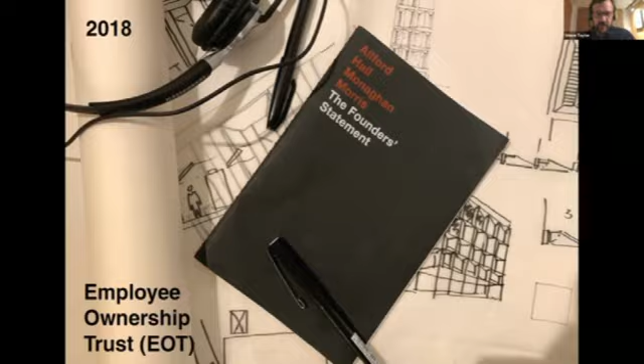We're all part of that co-op, and what the partners put together was a founder's statement about our attitude towards architecture around 3 principles: architecture, alliance, and ambition. These are the guiding principles that help us as a practice continue and approach all of our work, developed by the 4 founding partners while working together at university.

Firstly, it was for them about how the field of everyday building, rather than public buildings, that modern architecture has failed the city. So it's very much about the ordinary and the extraordinary, those ordinary buildings ultimately becoming extraordinary. And secondly, it's about how the functional program alone is not sufficient to generate an architecture. So form follows function, function follows form.

It's about constructing the idea. It's about understanding all the influences that affect architecture and its place, from a strategic citywide scale right down to the places where we live, work, get educated, get cared for. It's about those very average everyday buildings and making them extraordinary.

So the idea about constructing the idea is important for us. It's also a kind of theory of obliquity - it's about not really coming to a solution too early, but finding that solution through the process and approach, which we enjoy.

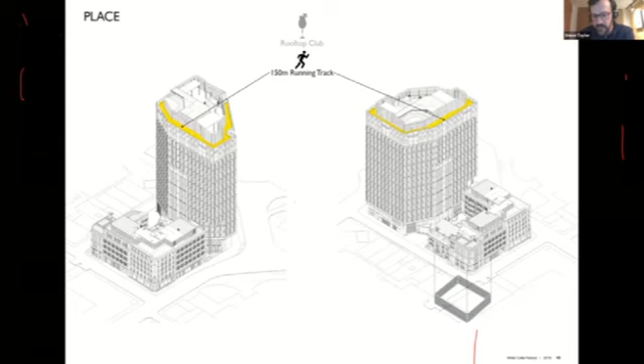The tops of tall buildings tend to be set away from the primary facade to allow cleaning apparatus to trundle around a track on the perimeter of the rooftop, hanging very brave individuals in carriages to clean and maintain facades. We felt that when it's not being used for cleaning the building, this perimeter track could be used for something else as extra amenity for the building occupants.

It was then about 15 floors of flexible workspace for lots of different occupiers, a multi-use, multi-let building. We had a public coffee shop in the reception.

Rather than a very stale corporate environment, this was very much an open, almost bookstore environment where one could come in and converse and meet people from the building in the reception and enjoy a coffee or a lunch. It was the introduction of a public courtyard and garden at the heart of this project.

Very urban, quite an edgy environment if you like. The idea of providing this enclave, this courtyard where people can enter buildings from, so all the addresses are within this courtyard, fully publicly accessible 24/7.

It's a nice idea. Cyclists being a really big part of our cities and how we move about them, so providing facilities for those. And then the idea of smaller buildings, so not just large floor plates for large corporate occupiers, but smaller floor plates for incubators and startups. So people starting out their businesses can rent space here, develop with this client, and ultimately take other space in the building or elsewhere in their portfolio. As a developer, very keen on nurturing talent and nurturing businesses.

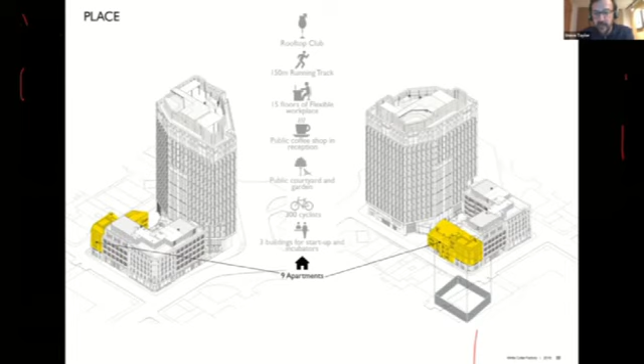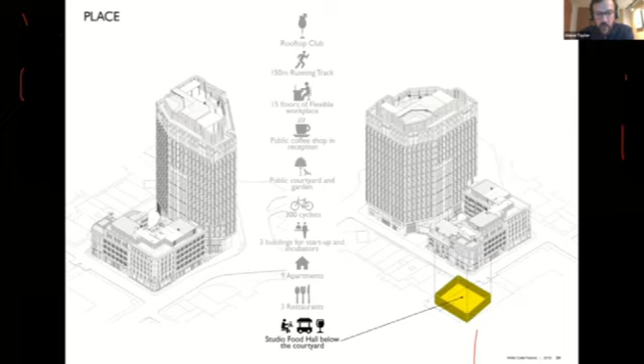And then there's also an element of housing, as a kind of mixed-use scheme in a city, with some food and beverage at street level. And then ultimately, I'll come back to this room because it's really important to us now as AHMM, a room beneath the courtyard, which offered this voluminous space for multiple uses.

So it's this idea borrowed again from Buckminster Fuller, who coined this phrase about doing more with less. It's this idea about reducing the moving parts of a building and what you put in, right down to those elements that all buildings need. So it needs structure, superstructure and substructure.

It needs services, so air and water and electricity through this building. And it's about skin, about the fabric keeping heat in and cool out, but also letting daylight and sunlight in as well. So it's about those three elements that buildings need, and really nothing more.

We're trying to do more with less, and we're also trying to make sure that everything we add to this building is doing more than just that one function. So structure is being used here—the concrete's being used to carry cooling through the building. We're installing cold water pipework in the structure to provide the cool for the building.

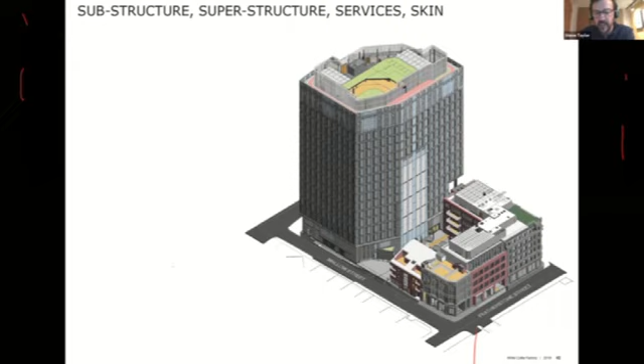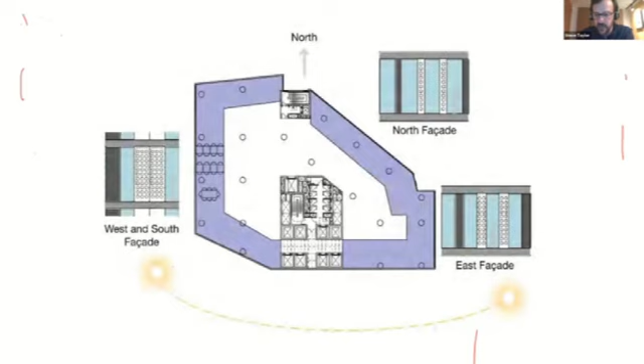The facades are letting the air in, but they're also working in tandem with our conditioning, our internal environment conditioning systems, by not letting too much solar gain in, letting air and light in, but not solar load. So we have a facade that changes in orientation, closed towards the south at about 30% glazing, and towards the north it opens up at about 60% glazing. So you naturally get that passive response to the environment and orientation, providing a natural variation to the architecture on the facade. Again, doing more with less.

So it's about ventilation through the facade and daylight. And even on the image on the right-hand side of this slide, that facade is only 1/3 glass and 2/3 solid. But in actual fact, the overarching view is one of light and air and sunlight and light and shade.

It's also about this idea of a symphony, if you like, of the services—the building's arteries that pass the systems through the building of air and electricity and fire protection, the life safety systems—bringing those to show, organising them carefully, but then above that having this concrete slab. So this is the idea of almost the sixth elevation. If the roof can be considered the fifth elevation, the soffit surely is the sixth elevation and occupies a large part of the internal environment.

So the idea of using that to provide character, using those functional elements to provide the character and personality of a space, is something that really interests us. But above that is then this cold water pipework, all embedded in the concrete. It's not a new idea for us—the Romans did it with hot water, as we know.

Lubetkin and others did it with cool water, but the technology sort of 50, 60 years ago let that system down. Today, with modern extruded plastics, we can have jointless pipework, miles and miles of it, without fear of leaking. So it's a very passive idea about cooling the building.

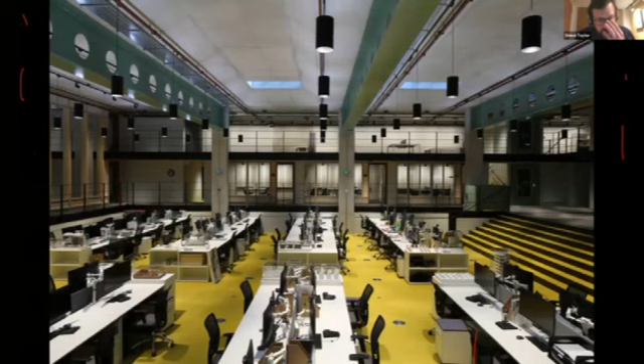It was a space that we felt was -- these found spaces in buildings are often the things that are most memorable. Certainly when we look back at buildings that are 100, 150 years old and repurpose those for the 21st century, one often finds that some of those quirky spaces are the ones that people are more interested in. So much so for us that we've taken the space ourselves as an extension to our London office and created another studio for us.

This is particularly pertinent -- we've delivered this through the pandemic, so it is as empty as it looks on the image until we're allowed back in there, probably in June when Boris releases us all from lockdown. But it was a space that's given us the ability to breathe a bit and widen the space for each of our members of staff, and really puts our money where our mouth is. So when we say to clients, build these spaces, they will come. They built it and we happen to come to it because it really suits our needs.

A really exciting space for us to inhabit post-COVID, with limited daylight from above and using circadian lighting, artificial lighting following the rhythms of daylight outside, linked through sensors to daylight levels outside and color temperature, changing throughout the day to make this a kind of healthy looking environment.

So a quick journey through this building from reception, from the main entrance approach, quite a robust and gritty street presence at Old Street Roundabout, into what we refer to as a kind of turbine hall rather than a reception hall. This idea that everything's stripped back, so structure, services and skin are really the only things that you see here, other than loose furniture.

And it's a principle which really tested the boundaries of speculative commercial office space. There are a lot of naysayers at the start that are sort of very familiar and comfortable with the vanilla sealed box for workplace, and we wanted to change the attitude towards that, and the developer, our client, was the driving force behind that.

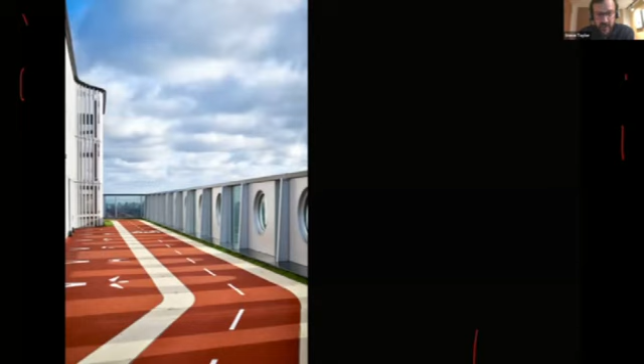That idea about the club at the top of the building, so the building occupants can come out and break out and have a coffee or a beer in the evenings, and also break out into the outside terrace, and then also, if you're that way inclined, take a run on the running track at the top of the building. So all amenities to break out and converse with your fellow building occupants, giving that fluidity and flexibility in the way people approach work.

And giving that sort of fluidity and flexibility of the way that people approach work, ever more important now as we emerge out of the pandemic. And the rooftop terrace as well.

So the White Collar Factory building was a project which really was about 10 years in its making, from working on other buildings to the concept, to the prototype, to the physical building fully completed and let.

The next iteration of that then brought us to Bristol. So this is the assembly building, which some of you will have seen going up on Temple Way. And it was for us the next stage in this attitude towards creating better, characterful workplace. So that idea about making the ordinary buildings extraordinary, the buildings of every day.

These buildings have somewhere between 2,000 and 3,000 people within them. So if you can touch and improve their lives just on their day-to-day working experience, then that's architecture working really hard for you. So this was a project, as I say, the next iteration of the White Collar Factory principle, doing more with less, putting fewer things into buildings.

It's a site you're all familiar with, a site that actually laid vacant for a number of years. It used to have this building on it. Some of you will remember it. I certainly do. A building that was there for about 35 years before its carbon was released by it being knocked down and the site leveled.

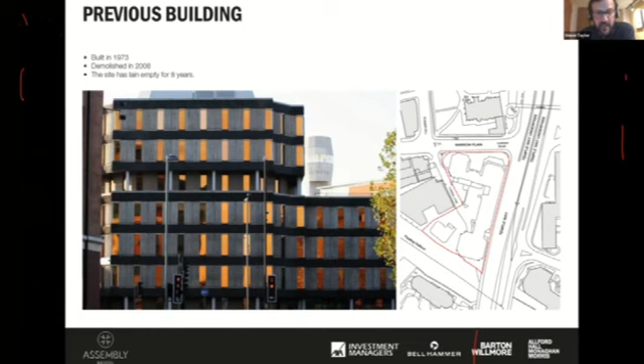And as it says here on the top left, the site laid empty for about 8 years. There was a planning application made by another architect with another client to put 2 buildings back on the site, but this was never realised.

We came in working with AXA as an investor into Bristol, so sort of like all these projects, investment from pension funds, taking long-term views. We won this project in competition.

Based on some very early sketch ideas that actually held true right the way through to what we've produced. This idea about opening the site up and providing public realm on the river - very few moments where buildings can do that, and we can do that in our city along the floating harbour. Wherever we do that, it's a surefire hit.

It's always very popular. In this instance, this site is south facing onto the river, so really great opportunity to link it with this river, link the city with its river and buildings around that. It's about enhancing the site margins and providing some space for buildings to breathe.

It's about sort of framing key views. In this case, it was the Pip 'n' Jay Church, and framing a key view between river and the church so that buildings didn't encroach on that view. And it's also about this idea that buildings themselves can frame views and create the idea of interest and intrigue.

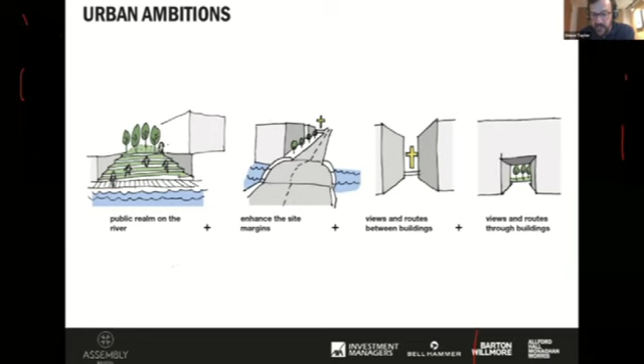To then continue on routes - in this case, a historic route which was once lost, brought back into sight. So a number of diagrams here show us that this project was about 12 months in its design before being submitted for planning.

This is just a snapshot of some of those moves - the idea about taking that site boundary, maximising its footprint in order to hold the street edges, understanding some of the moves sort of encouraged by the consented scheme, the previous project, looking at what can be improved on that.

This idea of creating this new route or re-engaging a historic route - this is Cheese Lane, which I love as a name, that continues onto Bread Street, the other side of Temple Way. So reintroducing that across the site to open the site up, opening up views of the river and access to the river.

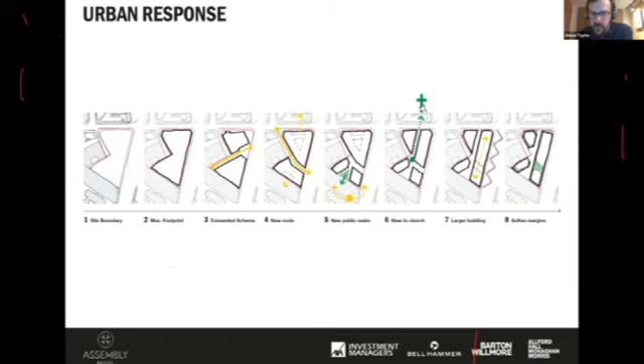So forcing the buildings apart on the river's edge and creating this heart towards the middle of the site that links these views from church through to river. And the next slide just indicates that.

So this idea of this sort of connection from station to city - this idea that we're introducing a pontoon on the river's edge to increase that, extend that walkway from Temple Meads through to our site and then up into the site and then on towards the city, and those connections, those visual connections between church and river, as I say.

And then it was about sort of picking up on some of those principles established in the White Collar Factory project and moving them forward again - 10 principles about making a place, about creating that journey.

Journey on approach to the building, through the front door, all the way up to desk. That enjoyment of the building has to work hard all the way through that journey. All too often we enter buildings, go in to find the sole function of that building, and then are left feeling slightly disappointed.

All the effort was made on the front door and that sort of curb appeal. We feel that sort of enjoyment needs to continue through every part of the building.

So it's about generous and flexible floor space to attract lots of different occupiers and allow lots of change - buildings that are robust to that change, enhancing the user's experience of the building and how they can interface with the building. All too often buildings can be very closed and sort of control their own environment, whereas we believe humans should be in control of that environment.

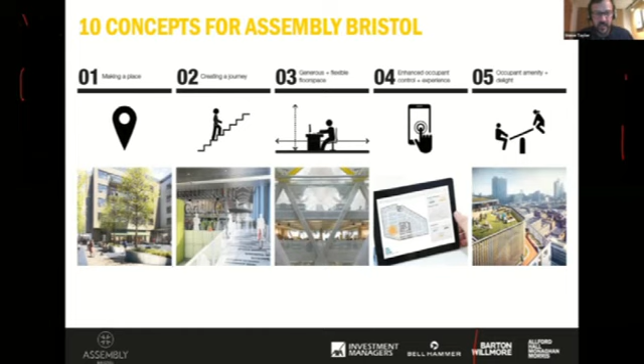And obviously adding amenity and delight, really important, as I say, in post-pandemic developments. The idea around supercores, around how people move up and down buildings through staircases rather than lifts necessarily.

The idea about passive systems, smart servicing, so not creating problems that you then have to throw technology at - facades close down against the sun. The idea about smart engineering, passing services through structure, structure doing more than one function again, and the same with facades, and also how we then build it, how we construct it.

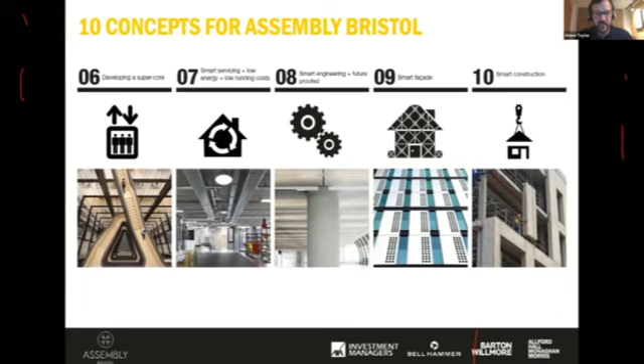Working with the contractors from very early on to understand the best ways of off-site construction and on-site, of course, minimising the number of trades and creating a carbon smart solution for construction. So it's about a building, as I said earlier, that provides for up to 3,000 individuals as one tenant, or a neighbourhood of tenancies as well.

So different occupiers, large, small and medium. As it happens, this building has now been taken by British Telecom as their regional HQ, which in itself is really exciting for Bristol. A bit of a shame that not more businesses could enjoy this building, but nevertheless a really amazing opportunity for them in the city.

So it's about well-designed workplaces, about complementary facilities, the idea about breaking away from work, and ultimately giving occupants that satisfaction of where they work, where they want to come to work, and in doing so creating a thriving, diverse community that better reflects the wider community in the city.

So a lot of these ideas actually look quite relevant today as we emerge out of the pandemic, but really were very much the direction of travel which we were on, along with a lot of our clients, and enjoying. I think there's just really an acceleration of a lot of those ideas as we emerge out of the pandemic.

So this idea about place, how that opens up onto the river, and this idea about these three buildings and the routes through. So you're holding street edges, but you're relaxing those edges within the centre of the project. And connecting to the city.

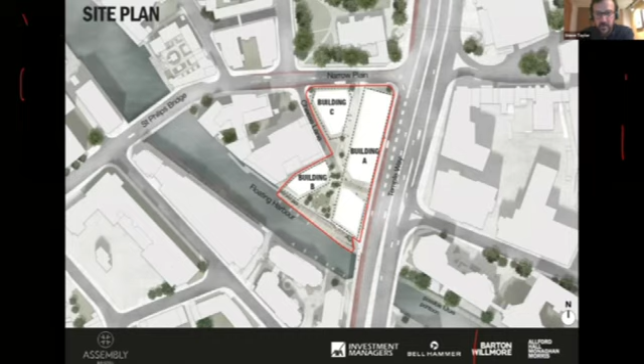So you might not make it all out in this tiny diagram, apologies, but this idea of us linking that walkway from River's Edge onto a pontoon beneath Temple Way and back up onto our site, and then onwards into the city via Castle Park.

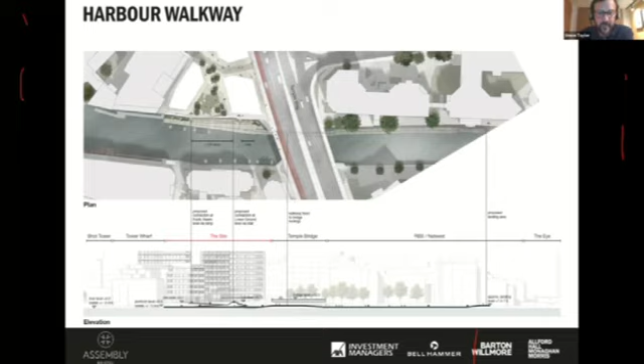So that creates a place which for us has sustainability and the environment at its core. It's about a diverse, active public realm, opening up those margins and opening up those routes through.

It's about reducing our carbon using passive design and efficient systems, whether it's about shading the building, so you're preventing that solar load, preventing the need to throw kit at it. It's about using LED lighting where you need it, but lighting that reacts to natural lighting levels as well, so it's not lights on all the time.

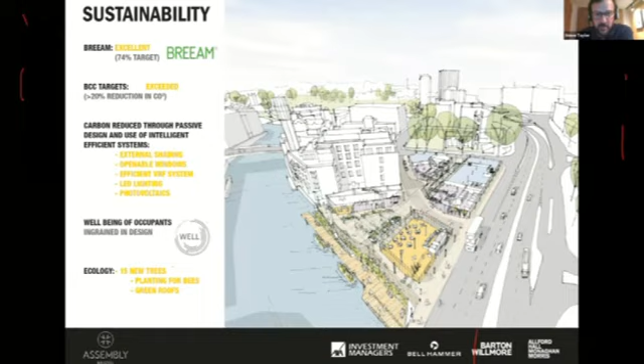Photovoltaics, the idea about sustainable energy generation, as we find on a lot of modern buildings. And landscape, of course, this biophilic idea between buildings at public realm level being really important, and using species of the area of the Avon Valley.

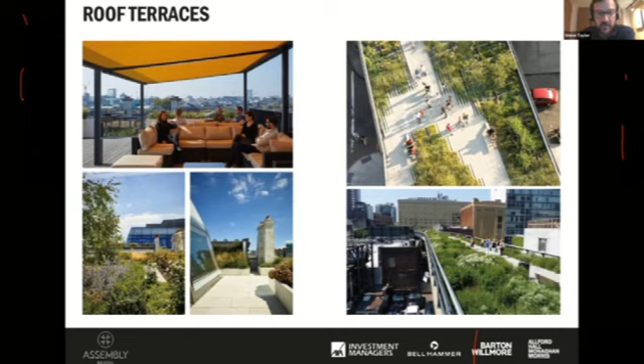And also on the roof terrace, on that fifth elevation, the opportunity for people to break away from work and convene at different roof terraces. So some are private, some are public to everyone else in the building, but different attitudes to how we engage with the city. And provide that extra greening, the urban greening, which is something that really interests us and ever so more moving forward, bringing that greening down onto facades as well with some of our more recent work.

So some of the conceptual diagrams about how we reacted to the context and some of those historic settings, how the floor plan, the building orientation meant that we could focus on the heart of the development as being where we enter the buildings.

The idea that Temple Way, as we know, is again quite a gritty environment. It's quite a noisy, dirty environment, which hopefully will improve over time. But the idea how we're using the building, the larger of the three buildings, as a buffer to protect the public realm in the middle.

How we're creating the two different ends of the building. One reacts to the city, one reacts to the river. And the idea about big open floor plates and how that can then be shaded by bringing the structure from the inside of the building to the outside. So structure which we need for the building, let's do more with it, and let's bring it to the outside to provide some of that solar shading.

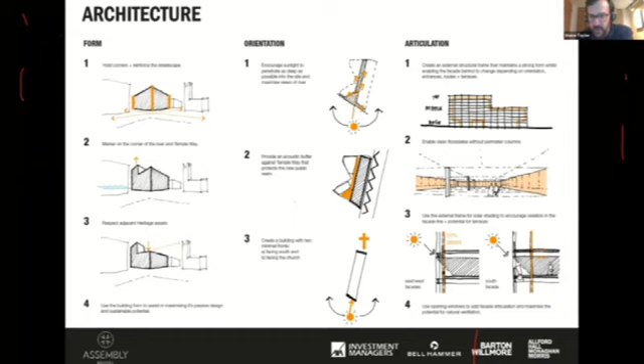So the idea that we're providing about 50% glazing on those more exposed edges, and then towards the south of the building, we're pushing facades back from the frame to provide outdoor amenity for each of the office occupying floors, and in doing so provide all the shade where you most need it on the south facade.

So we took those principles, applied them to the mass, applied them to the elevation, used the functions of things like staircases and lifts to then help articulate that longest of elevations against Temple Way, and help activate that most obvious aspect of the building as it faces the city. So the idea of how people traverse up and down this building and are seen doing so on the facade of the building.

Excuse me, take a quick swig.

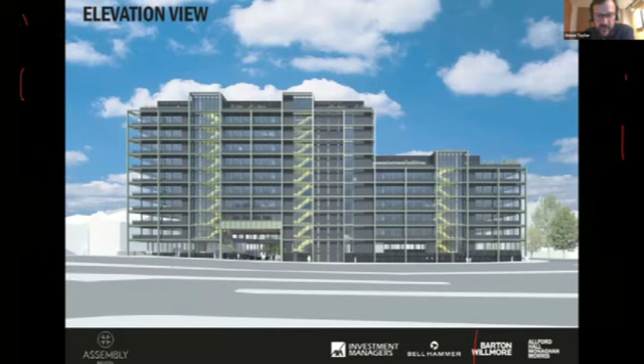How that facade, how the functions of a building are sort of played out and manifested on the facade, and that helps to add articulation and interest to the project.

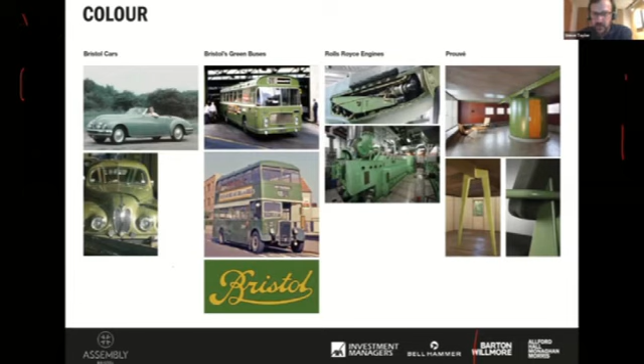The idea about colour runs through a lot of our work. It was good fun finding local references and finding the colour we wanted to apply to the frame. The olive green was something we think is embedded in parts of the history of Bristol. It's interesting, that idea of industry and transport and mechanics coming through to the mechanics of the building and being expressed on the frame.

Here we've exposed the steel frame, and we've painted it that olive green. We've created those moments here, like this extension of Cheese Lane up towards Temple Way.

This is now fully accessible to the public on their journey through towards Castle Park, ultimately bringing you into the centre of the development and the ability to enjoy the public realm and its connection to the river, providing this active frontage where everyone coming into these buildings enters from this courtyard.

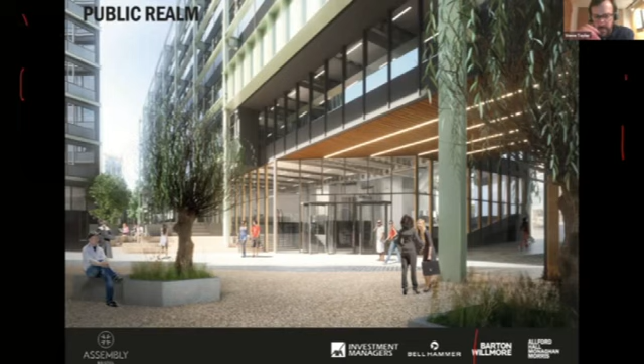So again, borrowing ideas developed at White Collar Factory in London and bringing them to Bristol, that next iteration of the idea. A bigger courtyard here than we had at White Collar Factory, enjoying level changes that all landscape architects love to get involved with, giving an opportunity to engage with the river and the city at different levels.

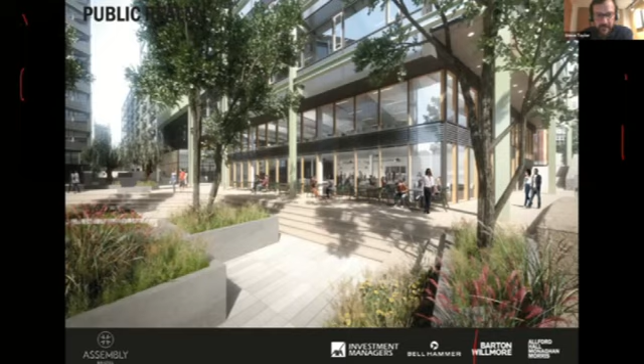More recent imagery showing how the other buildings are starting to come into play. This idea about cycle provision being front and centre of a development. Into the cycle store, it's all on levels, all at grade, so the cyclists have their own front door, not around the back, but front and centre.

Again picking up on ideas from White Collar Factory, not covering up structure with superfluous layers of plasterboard and follow-on wet trades. We need the structure, we need the skin. Let's use those as the architecture for the spaces internally and externally.

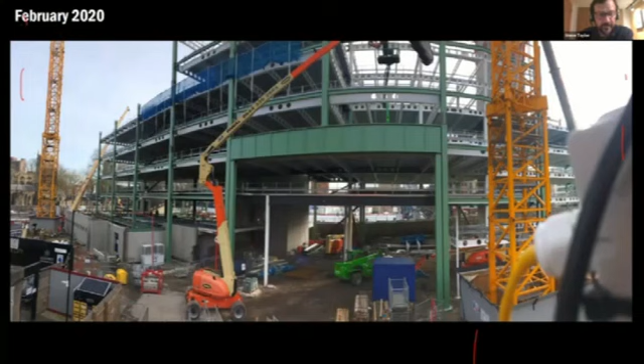This idea of opening up the volume, creating this library feel, or lounge feel rather, where building occupants can come and have meetings in reception and enjoy cafe, and potentially break out onto the public realm. So some more recent images of how the building's coming together.

You've all seen it emerging. These were from earlier in the year, as the new arch over Cheese Lane is appearing, with open floor plates, exposed steel frame inside and outside, ultimately.

Some of that glazing coming in, so you can see large picture windows framing views of the city, and then opening windows every 3 meters, so even if this building is separated into individual office cells or meeting rooms, every space gets access to fresh air. The idea about fresh air and natural daylight into the building is really important.

The orientation of the building as well—it's long, but quite shallow east to west. That gives us the ability to take all the plant off the roof and distribute it across the floor plates, so rather than centralized plant, we have local plant to each of the floor plates.

We draw air from the west facade, off this clean facade of the building, and then exhaust it onto Temple Way, so clean air comes in on this side, stale air out the other, across that narrow dimension on the floor plate.

That allows us to work more effectively, so you're not moving air all the way around the building from the roof down to the floor plate and around the floor plate back up and out. The energy is less, so our carbon is less in the operational energy of this building. It also results in a roofscape which is open for other uses like roof terraces and amenity, rather than being filled with building plant.

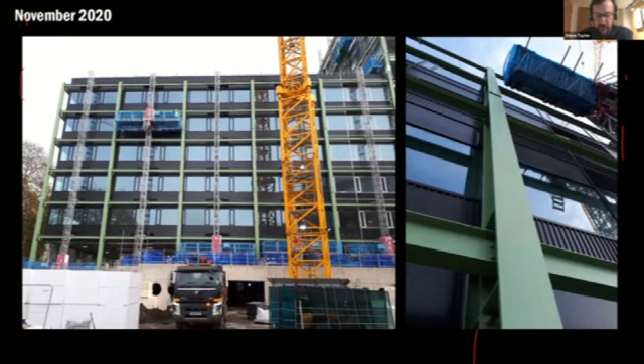Taking the idea of White Collar Factory but developing it one step further for this building. The facade, its orientation, the structure on the outside, the ability to open windows and frame views of the city creates the architecture—this layered depth to the facade, where operational elements like vertical circulation or structure are manifested on the facade of the building.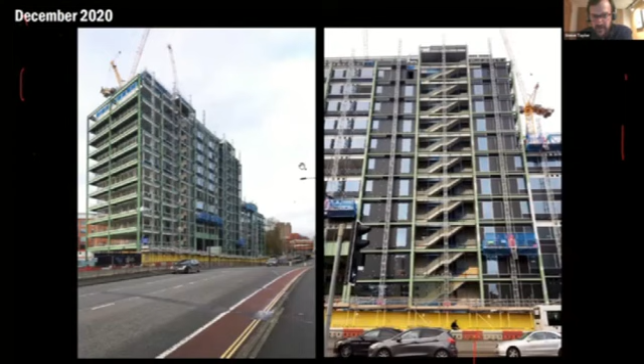That's coming towards completion, probably early summer of this year, as building A. The other two buildings we're about to start with: building B, on the river here in red, and building C, the blue building on the right hand side of this slide.

For these buildings we took the concept from the first building but developed it further. The second phase is not a copy of the first one, but an application of a kit of parts. What we really did was focus on how we put the building together, working with the contractor from very early in the design phase to develop a template for a kit of parts.

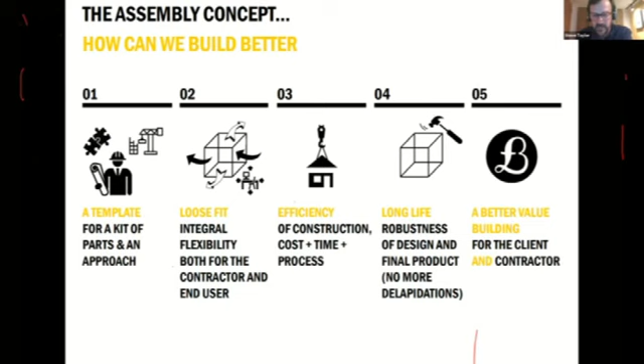So putting less into the building, doing more with it. This idea about loose fit, integral flexibility, both for us as designers and the contractor—how he wants to build it and how the end user enjoys it. There's an efficiency of construction, both in the time it takes to build and the energy it takes to build it and then run it. The idea about long life and loose fit, creating better value for both the client and the contractor, who needs to find some value in that process.

So it's about minimizing the number of building elements, minimizing the amount of on-site trades, maximizing modular and off-site construction, and minimizing wet trades and that reliance on water, which ultimately goes down the drain.

The idea about those key elements being finish and function—structure again providing finish. Maximizing modern methods of construction, early contractor input, and interrogating every single element again and again as a design team and a contractor team, to make sure it's as efficient as it can be. This project really took White Collar Factory principles, applied them through assembly building A, and then focused on how we procure and deliver that concept.

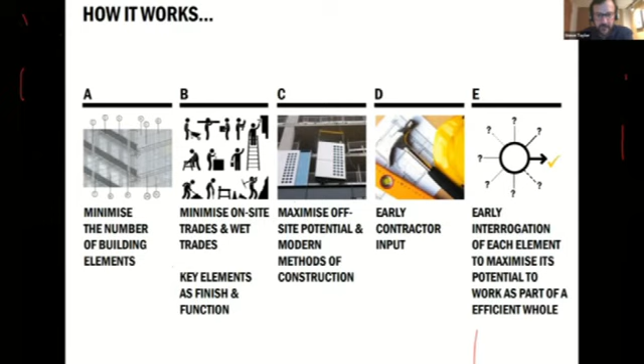So really focusing on the detail. And of course also looking at, as we've done with previous buildings, orientation—working with our in-house specialists at how buildings overheat, how they're overshadowed by adjacent buildings, so how facades can adapt to suit different conditions in its urban context and different orientations.

Facade systems again, where one can open windows, where facades are closed down to prevent solar gain, but there's a kit of parts that can change in assembly and organization depending on orientation and position on that facade.

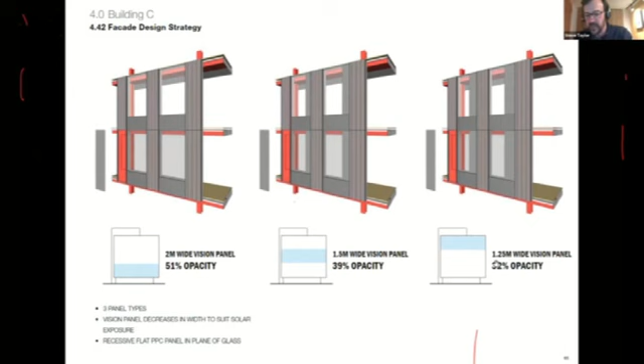You can see in these diagrams how the amount of opacity reduces as we go up the building. Where it's overshadowed by its neighbours, it's more open. Where it's up against the sky and that solar load, we close it down again to about a third open, two-thirds solid. That starts giving us a very subtle idea about the architecture—we're not having to apply anything else to the building. It's that function coming through and manifested in the architecture.

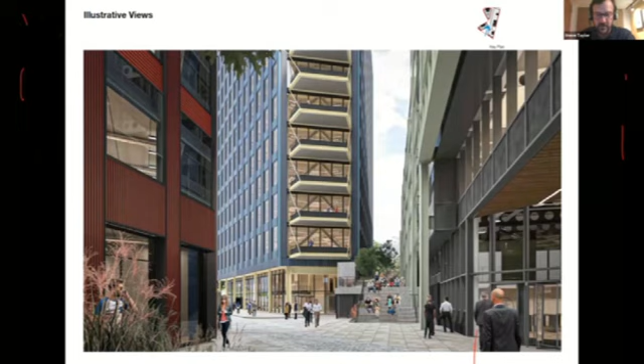Just some very early conceptual images of it in the city. The idea again towards the north, how the core is positioned with the functions of that core and its movement being manifested on the facade.

The idea about it lining Cheese Lane, this connection through and underneath Building A, but how the heart of the campus is where we enter these addresses and maneuver through quite a linear space and into the core and up the building. Quite a grainy image there, I apologize, but this idea about lining the street with reception, so we have that active frontage and engagement with the street at Cheese Lane, this wonderful cobbled street.

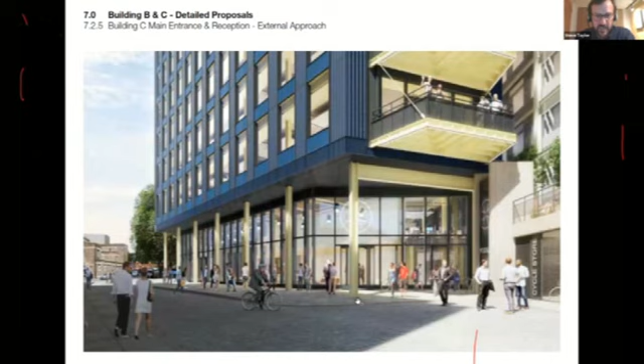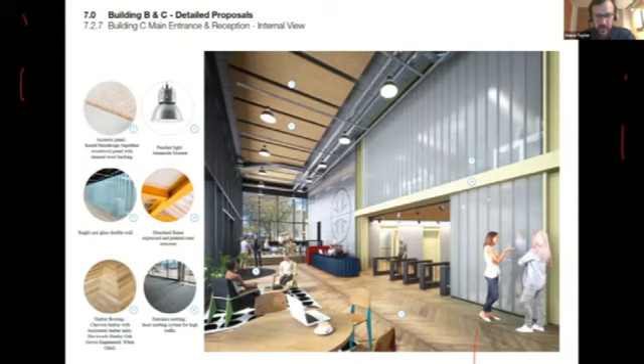The functionality of that space being very open again, open to the city and for the building users to enjoy. A couple of views there with the reception.

This idea about a super compact core, putting less into it, but allowing staircases to encourage their use with these large circular picture windows.

So as one traverses through the building, one can enjoy framed views as you descend the staircases, with these framed views over the city, and daylight as well.

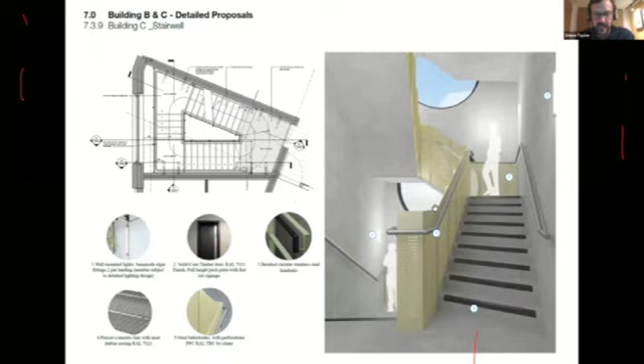And then a very unique shaped floor plate, this sort of arrowhead wedge of a floor plate, which frames a view towards the south and back up towards the wider part of the building. So really efficient open floor plates, lots of opportunities for different occupiers to enjoy.

And then at the prow of that wedge, or the nose of that wedge if you like, the idea of providing solar shading through balconies.

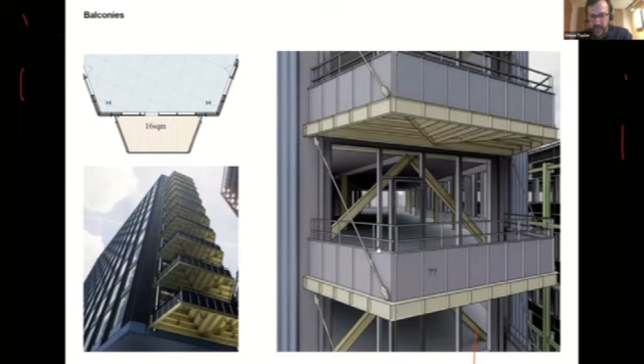So every floor plate gets its own outdoor amenity, overlooking the park and the river and the rest of the city beyond. Occupants get private roof terraces, private balconies, but there's also a communal roof terrace at the top of the building, again enjoying those views.

And the idea that there's this sort of club room where different things might happen, whether it's a gym class or an important meeting or some other uses potentially connected to community uses. This idea about engaging with the city and engaging with its rooftop there.

So you see this rooftop pavilion idea, which in turn helps to conceal some of the smaller elements of rooftop plant.

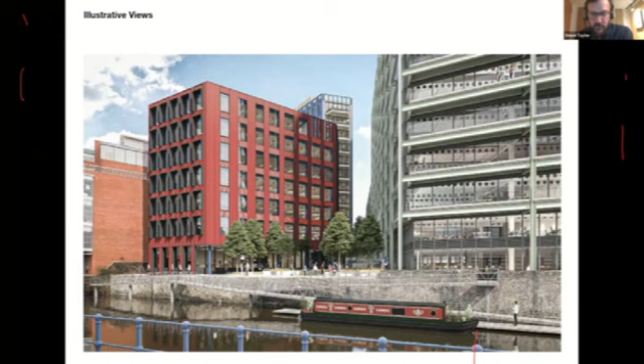And then just a couple of final slides of the third building, which is taking a bit of a backseat until the second building starts to emerge. A smaller, more slender building on the river, how that engages and is entered via that new crossing of the public realm from Cheese Lane, opening out onto the river.

And again, opening those views out towards the south and onto the floating harbour, and that vibrant, active public realm at the heart of the development.

So the next project, or the last one I'm going to take us through, is Number 1 Temple Way, a building you're no doubt all familiar with, as architects we're all sort of very fond of. A Brutalist building, one of very few in the city.

We're doing similar work on the IBM building, Denys Lasdun's building on the South Bank, next to the National Theatre. So this is kind of our Bristol version of that.

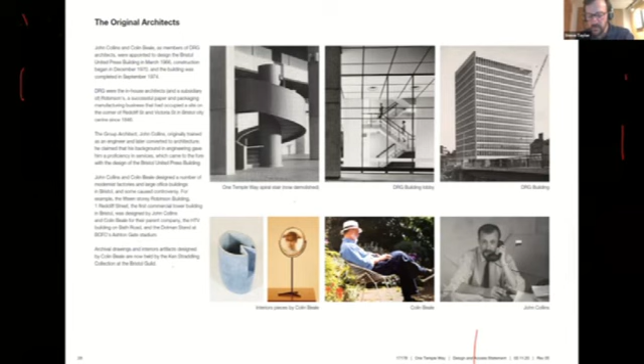A building designed by Colin Beale and John Collins as part of the DRG group, a really functional building. Following our ideas, whether it's white collar factory or assembly, these guys were doing it for this building 50, 60 years ago.

Building designed for Bristol Evening Post.

A building which we found has an amazing archive, including the original cardboard model, which we found in the basement store of the building. So lots of opportunity to engage with the original design and the concept.

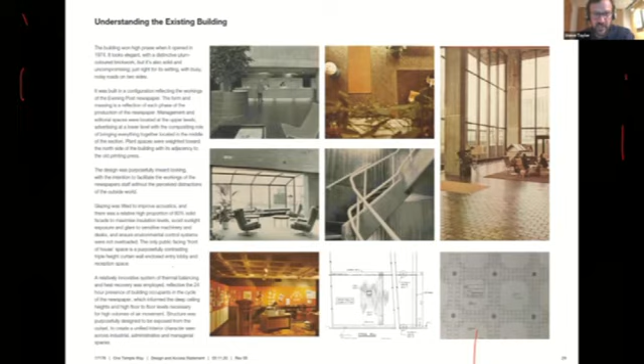And it was an idea about this building being around the clock, so it's about the writing, editing, production and distribution of post, of printed press.

It's a building which followed its inner workings onto the outside of the building, so each of the different interconnecting volumes, whether it's vertical circulation or some of the other pieces.

So you've got the windowless plant room, which is halfway up the building, weirdly for a commercial building. This has a plant room top, middle and bottom.

But this then fed into the printing press building, printing hall, which is now gone on the left-hand side. The idea about editorial, composing and dispatch being contained in different vessels as part of the building as well.

A building which was by brief designed to be quite inward looking, quite private, but the only public-facing element was the forum and staff access facilities, as you see in the image on the right-hand side where its current front door is.

A building which, since the press left it, and obviously our attitudes to how we read and absorb news is very different today, a building designed for such a bespoke use and function has really struggled, I think, in the latter part of the 20th century to find better, more appropriate uses.

But nevertheless, a building which has captured carbon and is robust, which should be robust to change. A building that's kind of lost its way a bit—it's accrued lots of elements in trying to make it attractive as a workplace. The concrete, the wonderful coffers on the soffit, need a lot of work to clean them up and improve them.

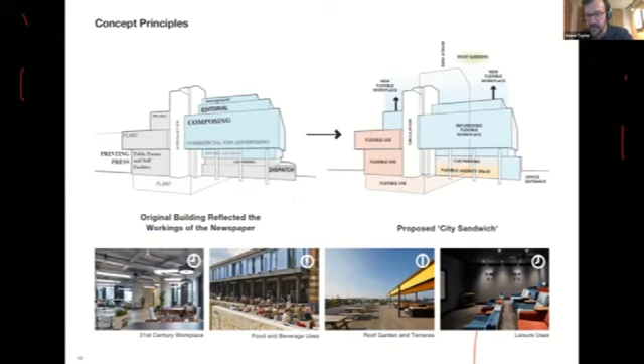So 21st century workplace, food and beverage uses at street level, the idea about roof gardens and breaking out again, and this idea of leisure uses within it. So again, a sort of city sandwich for Bristol.

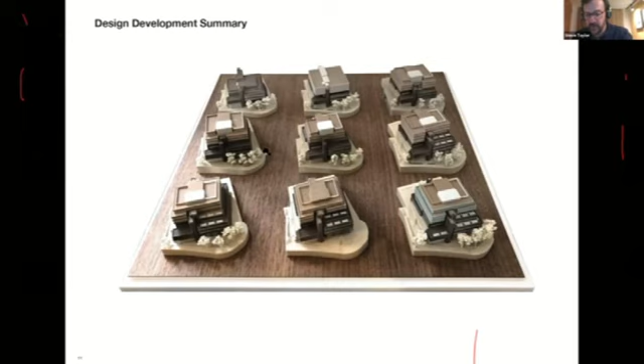We've looked at a lot of alternative schemes for this building. As I said at the start, we've got a really active model shop, which is a great resource for us to test in three dimensions how you might interlay this building—these were all iterative design responses, and there's a whole other cardboard box full of even more models representing different ideas that we tested.

Ultimately, it's about understanding the original building, looking at this asymmetric balance of volumes, adding new volumes amongst the original—a sort of Jenga connection of old and new coming together, bringing daylight down the building. These are very deep floor plates, very inward looking. Modern office occupiers need access to daylight and air, ever more so now with narrower floor plates, so bringing daylight down and through the middle through a new atrium is really important.

And then how you might top the building with a new mass, which doesn't dominate but sets back and does a sort of inverse or flip of some of the boxes that exist below. So some of these cantilevers, we look to replicate that sort of striation of broad shadow gaps and these shelves of accommodation. We continue that, but change the proportions as we go towards the top of the building—so it's a kind of lighter weight top to the heavyweight bottom.

Then a couple of moves here in this slide about how we take the existing mass, add a sort of dumb mass on top, and then start to articulate that by extending cores through and atria, stepping down and stepping away from those more sensitive edges. So you create this multi-layered building of new and old coming together, providing another version, a sort of new datum for that silhouette against the city skyline.

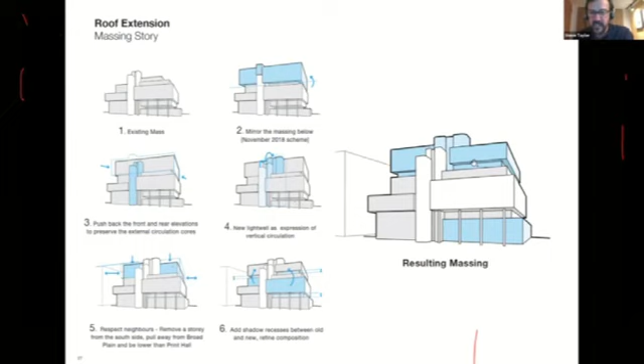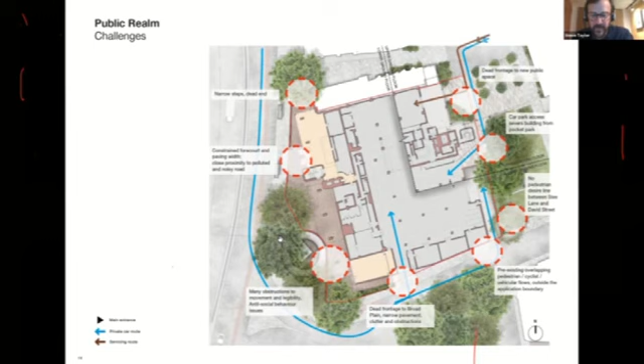So lots of problems around the ground floor, which we've sought to enhance and open up—extending that notion of the yellow, that notion of public space.

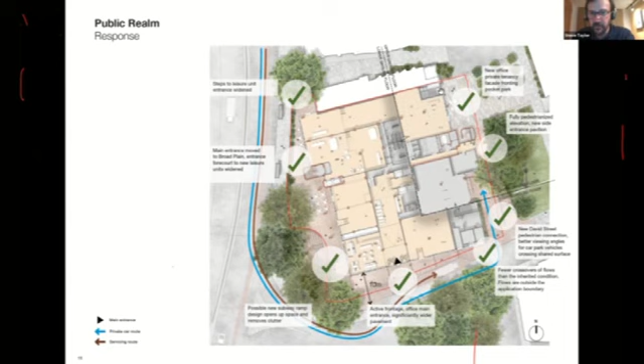So whether it's shops and retail, office reception, cafes, more retail, food and beverage here, different access to maybe a basement gym, or up to the leisure facilities halfway up the building, and then towards the rear of the building, engaging with the new public park which is emerging here, and a new address. What was once where vehicles left to distribute the post, once a loading bay, is now an office and cycle entrance into the building as well.

And then looking to take away in order to improve public realm as well. So a couple of slides here, just looking at how the building engages with Broad Plain, and how we want to readdress the building towards the south and onto the greenery, that biophilic idea of opening onto Broad Plain. So we're bringing the main entrance around to the south.

We're pulling the building back, so we're opening up these key views. So this main view - those who cycle from the east and from Bath into Bristol could arrive here, and all of a sudden we've opened up that view on towards Narrow Plain and towards Castle Park. And as this image illustrates, really helping to activate this corner.

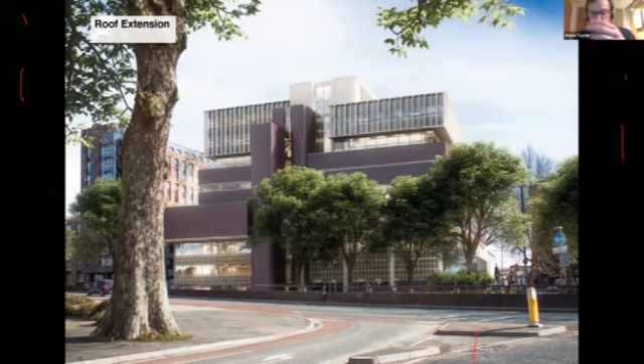So new reception with cafe and other food and beverage and retail units either side, widening the pavement, providing lots of scope for cycle racks for the public. And just visualizing that idea about a lighter weight top on the heavyweight base.

So where we are making new additions to the building, we're following the spirit of the original, but also making sure that we're sensitive to it and not trying to copy it overtly. So we were interested in the idea about those wonderful coffers, that sixth elevation. Looking at the work of Erwin Hauer, a sculptor, we're inspired from between that and the coffers of the building, bringing that through 90 degrees to become a vertical surface, extruding that, layering it, and using it as this precast concrete veil to help provide some solar control for the new elements of office floor plate.

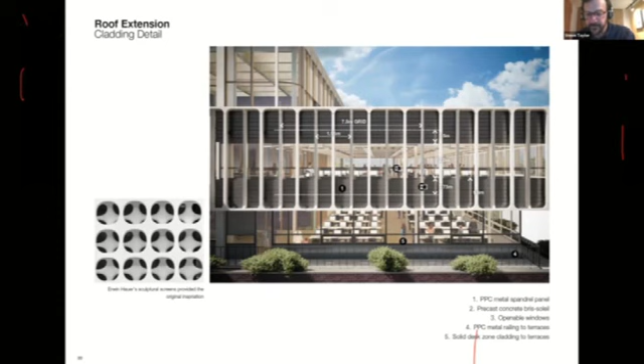And as you approach from Temple Way, the new entrance, this idea about this finer grain of that new precast concrete sculpture, a kind of human scale at street level, and then a broader version of it at the top of the building where it's enjoyed from wider views.

So that's me done with a number of projects. Thanks for bearing with me.

Thanks, Steve, for your patience. And I'll hand you over now to Ian Williams, who'll take you through some different buildings from different sectors that we're involved with in Bristol. Thanks, Ian. Yeah, brilliant. I'm just going to try and share my screen. You've turned it off there, so that's good. Okay, so... here we go.

So I'm going to talk to you about three projects that we have in the office, and they're at various stages of development. It's a new office building - the first one - a series of housing developments with Bristol City Council, and a later living scheme as well. The first one is a new office building in 100 Temple Street.

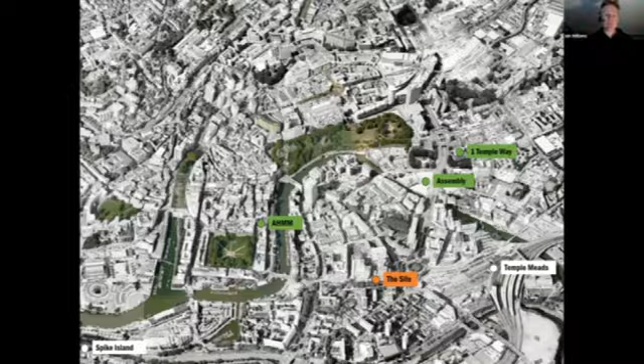We really like this building. We enjoy the depth of the facade and the way that it turns a corner. The depth of the facade is picked up in a lot of the stuff that Steve's just been talking about as well, so it's good principles for the building that we want to latch onto and use.

There is a bit of dead space to the west. This is only, for those who don't know the building very well, 2 phases of a 3-phase building. So on the next stage here, there's an area of blank brick facade on the west that was intended to be built upon. We're looking to retain as much of the existing facade as possible on 100 Temple Street, and build within the gap in between, effectively.

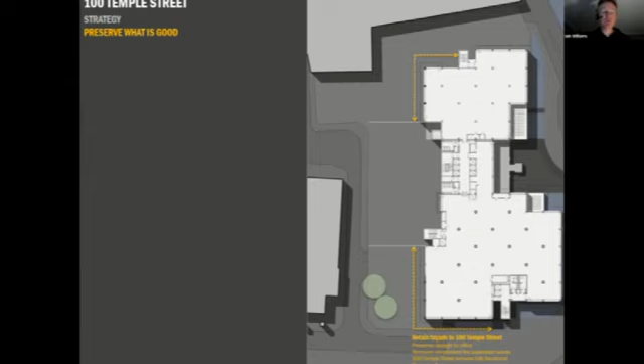Our new core locks within the blank west facade. We're retaining the existing trees, and we have south-facing balconies, providing shading for the building. We've also created a new pocket square off the Brunel Mile.

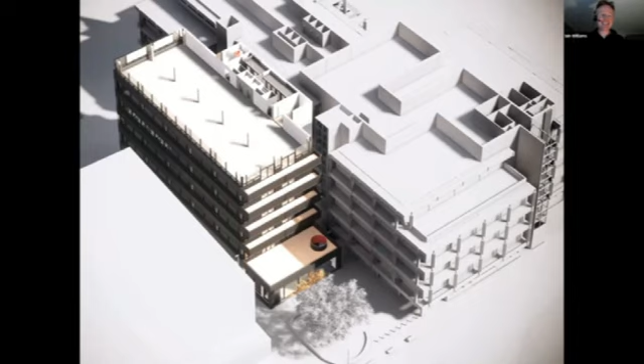This is an axonometric that shows that it's 6 stories high. The ground floor kicks out at the base. We're intending to take up the bottom 2 floors of this building, we think, at the moment, with our new offices. As you can imagine, there's lots of interest in the office on that - it's not the easiest thing to design when you get 500 architects asking about it.

We're providing a simple large floor plate on each level, and the core off to one side. It contains 2 staircases, both on the outside of the building, and toilets and lifts in the centre, so the staircases are more pleasant to be in and encourage people to use them, as Steve's been talking about. The reception is a nice, simple reception, with very high floor to ceilings generally throughout the whole building.

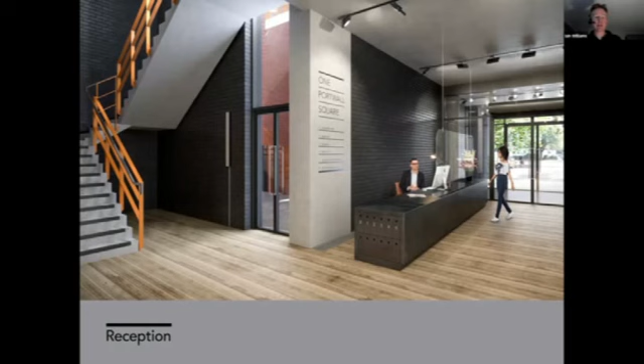This creates a light and healthy atmosphere in the building as well. We've vetted it for a post-COVID world, and all of the stuff that Steve's been talking about is perfect for that. So we've got passive ventilation and openable windows on every floor.

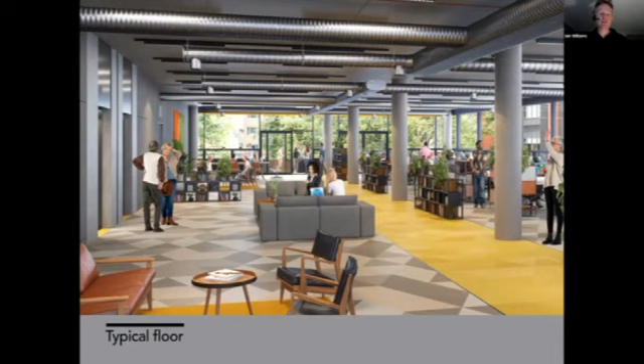This is a view from inside, looking onto the balcony. We've also got lots of bike parking spaces - twice as many as needed by BCC, with corresponding lockers and showers as well on the ground floor.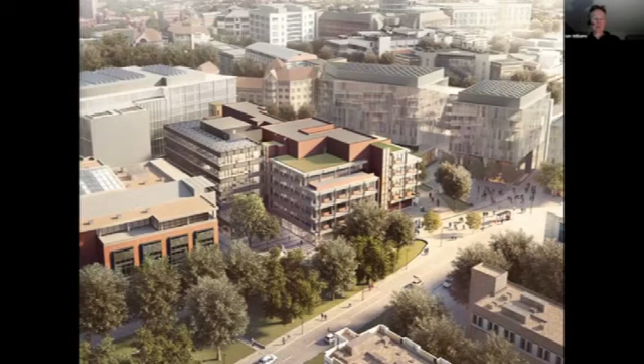So you can see it in the place of the emerging master plan here. You've got the Pocket Square off the Brunel Mile, providing some relief along there. It's not visible from St Mary Redcliffe steps - it's pushed back enough to not impact on that. And it does step - the massing steps up to 100 Temple Street as well.

So the next buildings I want to talk about are a series of housing schemes that we've designed for Bristol City. The brief was to try and make their existing housing stock better than it is. They're a suite of schemes that are around the planning stage at the moment - we're only taking them up to planning currently with Bristol City.

So the first one's in Boddington Walk, in Lockleaze in North Bristol. It's the site of a former allotment site with Gainsborough Square to the west. BCC have tried a few times to develop this site - it's the whole of that area there. We've now managed to get planning for this project.

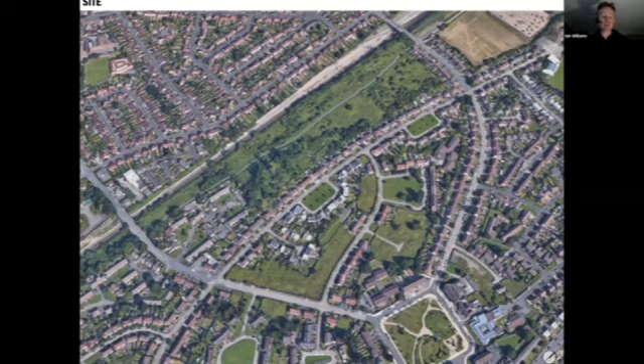Yeah, so you can see it's a tricky site. There's lots of constraints - it shows an existing cycle path that we need to maintain and improve, and an SNCI nature reserve. As you can see, there are lots of back-to-back conditions as well to repair around the site. So although it's a large site, there's actually very little developable area on this.

So Legal and General are going to be developing this site out. They provide modular homes. We've had quite a lot of freedom on the outside of these buildings, but very little on the inside as they're sort of pre-packed and shipped out. But what it's meant is that we've been able to influence the public realm a lot more than we could have done. You can see there are some benefits of off-site construction via Legal and General.

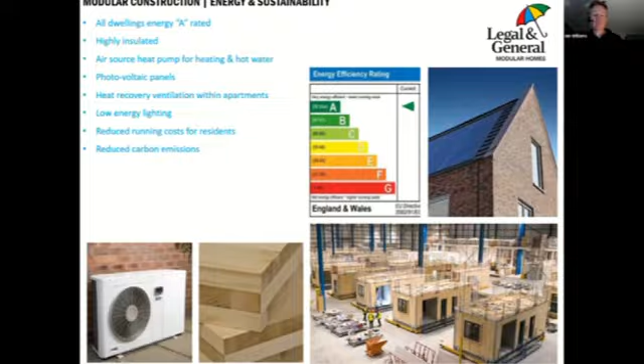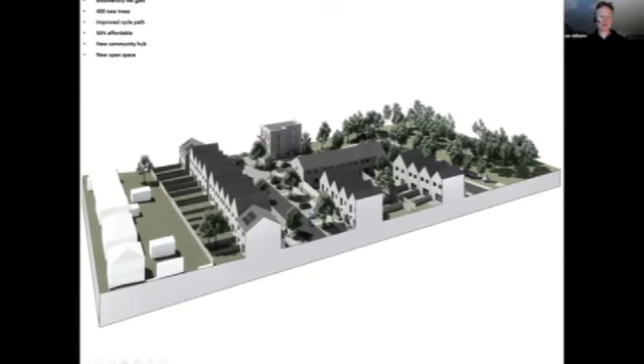This is the first scheme in Bristol to provide a biodiversity net gain, which is great, and it's also 50% affordable. It repairs the back-to-back conditions, as you can see here - this is the existing back, and it creates a new back to it, and new streets that run parallel.

We've integrated the parking within the street rather than doing parking lots, which creates a good public realm with lots of trees around it, and tries to disguise the parking as much as possible within the streetscape. We've paid a lot of attention to the thresholds and the front doors, and the defensible spaces, and the spaces between the buildings as well, because they're obviously very important.

We're actually doubling the densities on this site. Usually an area would achieve about 25 dwellings per hectare in areas like this, whereas we're over 50 dwellings per hectare at the moment. We've got planning approval for this now.

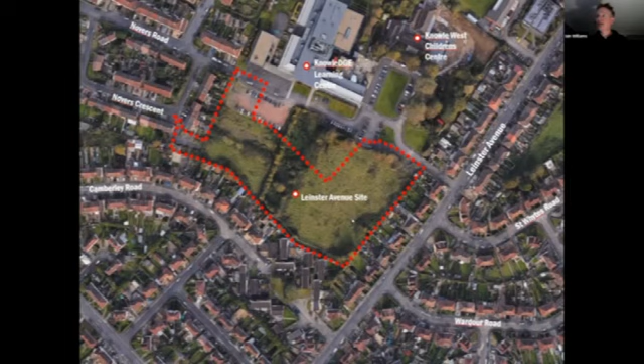So this is the second of the Bristol City Council planning schemes. I'll go through these quite quickly, but there's two that we've got in Knowle. They both follow similar principles to Boddington Walk. This is the first on Leinster Avenue - it's a U-shaped site that wraps to the south of Knowle Sixth Form College. So Knowle Sixth Form College is up here, and that's the site around there. Again, we've got lots of back-to-back conditions around here, which we've had to repair.

You can see the SUDS and the planting to the southwest. It contains 3 or 4 bedroomed houses, and there's also some bungalows at the top here at the northwest. It's also a 100% affordable development as well.

So I'll just snip back to there - you can see the sixth form here, and there's a sixth form centre here as well that I'll come on to in a bit shortly. Again, we paid very close attention to the front doors, the porches, and the spaces between the buildings, and used a palette of very simple brick materials.

We understand this is about to officially get planning approval very soon as well.

As I say, this is the sixth form building as well, which is part of the site, but is also sort of between the two sites. It mediates between the school and the existing development.

I'll just go through this very quickly. It's a simple rectangular building with brick fins that help the shading and mediate between the two. Housing to the south is the same bricks as the housing to the south would be. It's a sixth form special educational needs block, and it's also got a sports hall.

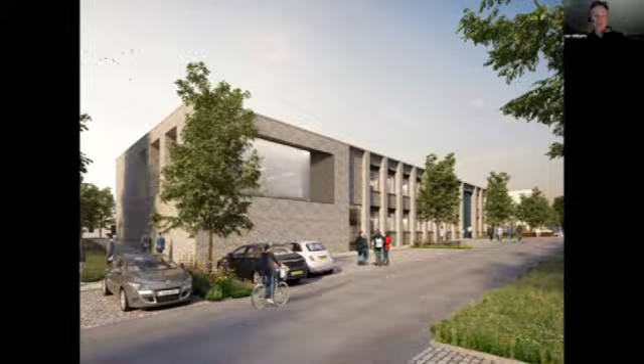You can see it's got very robust materials internally and externally, and the front doors are signified by a double height space with some glazed bricks. Interestingly, the glazed bricks here are picked up in some of the details within the porches of the housing around it as well.

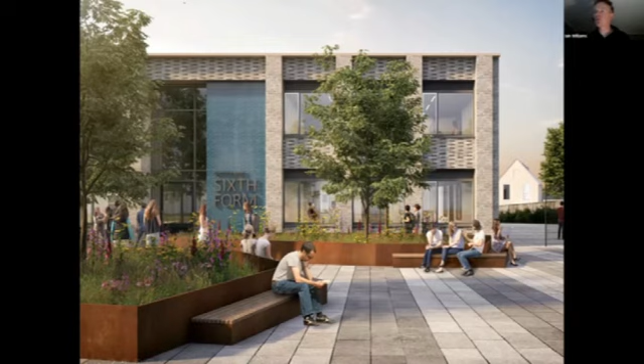And this has just been submitted to planning. So the last scheme I just want to talk about is the Vincent. It's a built scheme just at the top of Redland Hill, just south of the Downs.

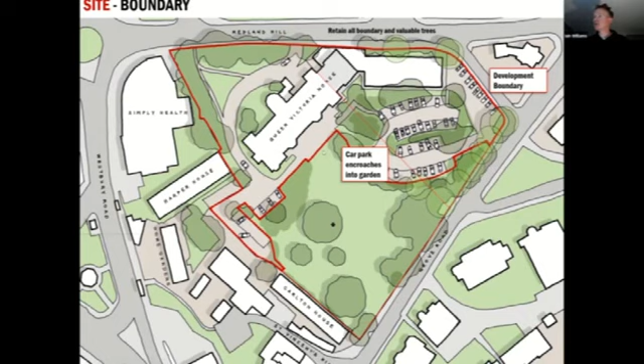You can see the site boundary in red here, and how Queen Victoria House relates to the landscaping to the south. There was existing car parking that encroached into the front, onto the back of Queen Victoria House, but within that formal setting. And also there's a no-build zone within this garden as well.

As it's a later living development, we're keen to get level access across from the entrance of QVH to the new development zone. So we've carved an entrance between there's a 1950s extension to the main house, Queen Victoria House, and we've carved an entrance through that and into the development zone here, and then delineated the no-build zone to the south.

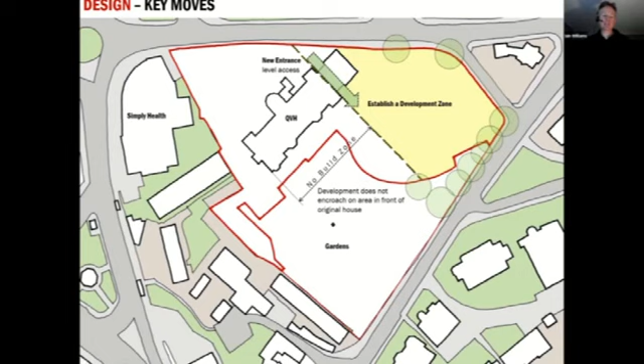Then we've created 2 new build blocks. We carefully set them within the development, so we get maximum views out and light into the apartments. They follow the same orientation as Queen Victoria House, and they step down the hill as well.

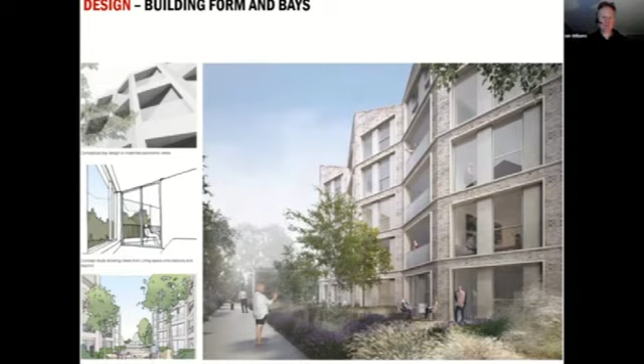So you can see here the layered elevation with a new build block stepping down the hill. You can also see there's a little penthouse at the top of the existing 1950s extension that provides a little hat on there as well. And it also helps the elevation as you're looking up the hill.

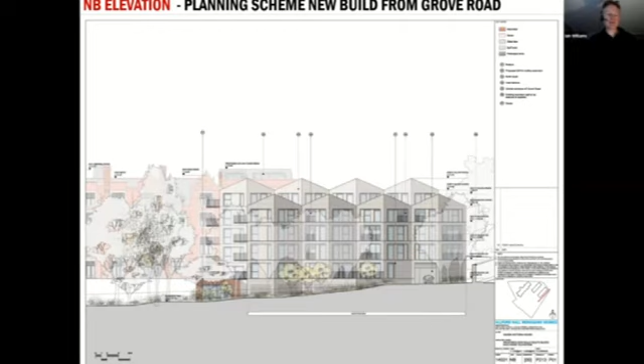And facing onto the garden, there's the communal facilities down below - a swimming pool, a spa, gym space, treatment room, sauna, and yoga room.

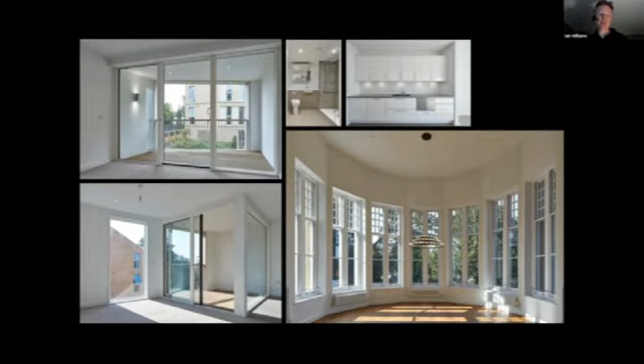Wow, you caught me by surprise there. Sorry, thanks very much, Ian. I thought that was an absolute fascinating story, I must say. I'm really looking forward to going round some of these buildings once we're allowed to. The Vincent isn't far from where I live, and they've already said they'll show us around once we can. And I guess the Assembly too we'll be able to go and look at.

I thought it was interesting, the story about the relationship of glazing to the orientation of the building, because that's come up on quite a few of the schemes we look at through the Civic Society and have discussions about. So we've got one or two questions on the chat line, if we've got time to do that.

There's a couple of people saying they used to work in the dreadful building that was knocked down and the Assembly's replaced, which is interesting. And people were saying how good it was having stairs with views and daylight, and asking what materials were actually used in the stairways at the Assembly.